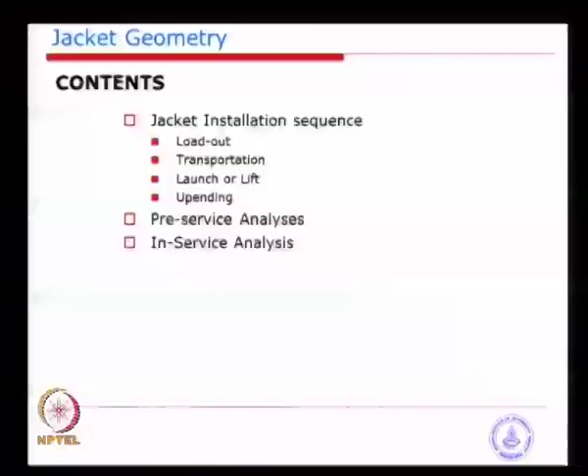So if you look at this structure, both structures have foundations in terms of piles fixed to the ground. In the previous class we discussed a template through which the pile goes through. In this particular case, the template is in a slightly different form because the water depth is larger. So we did not want to have a pile going through the leg, instead we have a skirt at the bottom through which the pile is going through. Of course, there is a connection between this pile, the skirt, and the leg, so that the load coming from the jacket structure can transfer to the pile foundation through that plated connection.

You see here there is a plated connection at this interface. By doing this, what we have saved is the length of the pile above, so much length instead of driving the pile through this. So now you have got only one pipe instead of pipe-in-pipe, which we normally have for the main pile. So these concepts have to be devised as early as when you are thinking about the idea of a platform at this location.

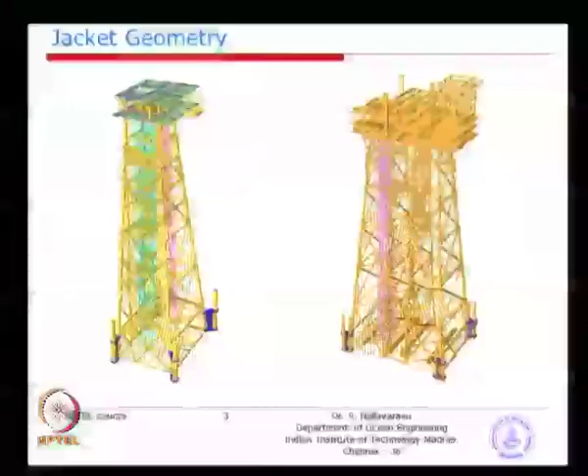Similar structures, most of them deep water structures, about 150 to 160 meter water depth. That is why you see all of them having skirt piles, but the number of skirt piles differs from platform to platform. You see here only 2 skirt piles, whereas here 3 skirt piles.

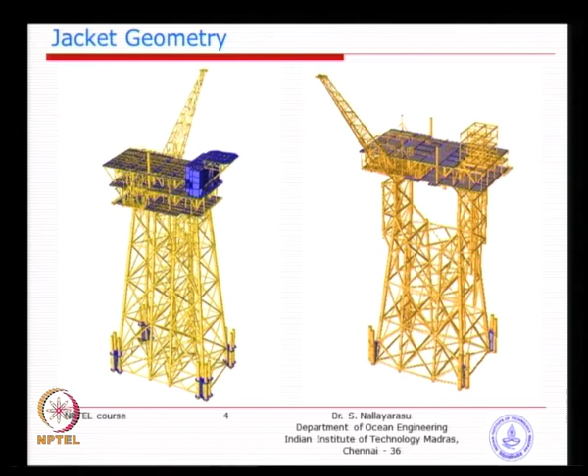How did we come up with this idea? You have to think. When you design a foundation system, some of you might already have gone through basic civil engineering, soil mechanics. As the load increases, you have 2 choices - you can go for multiple points.

The point load transfer by splitting the loads, distributing them to various points by making columns. When you design a simple building, you normally try to put 4 columns. Nobody wants to put a column exactly at the center of the room - that will not be acceptable. You put 4 columns, and if not enough, or if the foundation system is very weak, you put additional columns in the periphery.

If not enough, what will happen? You actually take the foundation deeper - that is the concept of pile foundation. When you design a simple spread footing for buildings, you dig say 2 meter, 3 meter depth spread footing foundation. If the loads are still so high that the foundation deforms excessively in terms of settlement, then you find ground or underground where the soil is stronger, so you dig deeper and deeper.

While doing so, the concept of foundation changes from a spread foundation to a point load foundation, which is basically the pile foundation. That is why in this particular case we have 2 piles which are adequate to transfer the load safely, whereas in this other case we have 3, because the loads are excessive.

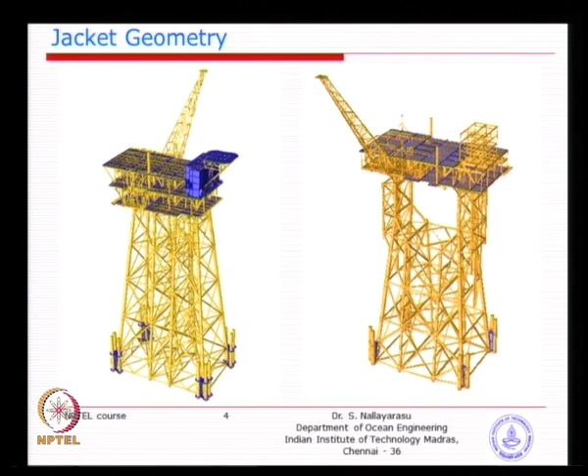So you see this picture at the bottom. When you place a jacket in upright condition, you could see that it has to rest prior to the piling being done inside. For example, these are the legs - you are going to do piling by driving the pile, but before that the jacket has to rest on the seabed. When you transport it to the final location, you place it on the seabed.

It has got its own weight. If the weight is too heavy, what will happen? Even before the piling is done, the jacket will start sinking below ground, which is not acceptable. So in order to prevent that, we have a temporary foundation in terms of a spread mat foundation - that is called mud mat.

In fact, it is given in the next slide. If you look here at the bottom, it's a little dark there, but you see a plate kind of arrangement at the bottom. That plate is nothing but a steel plate arranged and fixed to the structure, so that when you place a jacket, it takes the pressure due to its own weight, because it will take a few days before you start piling through the skirt sleeve, maybe 2 days later.

So the idea of the mud mat is very similar to any simple foundation design for onshore structures. Simply what we need is to spread the load in such a way that the vertical deformation is lower. At the same time, when you place a jacket in sea, it should also be stable.

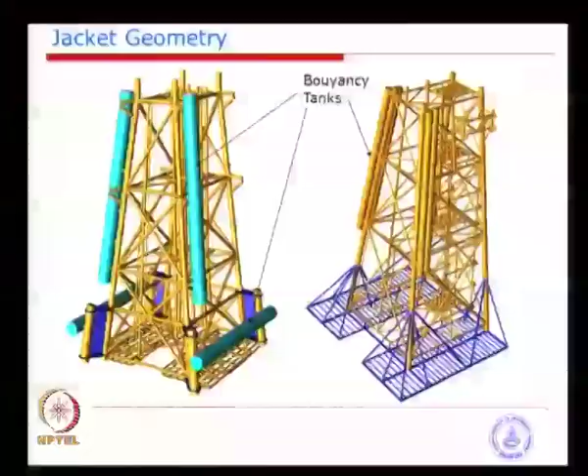It should not slide, number 1, it should not overturn. I think you might have studied simple overturning stability, sliding stability, vertical and horizontal equilibrium due to wave and external forces. All those things need to be done to arrive at the size of this foundation, because after all, if this is not safe, you can't do piling, because it will already overturn.

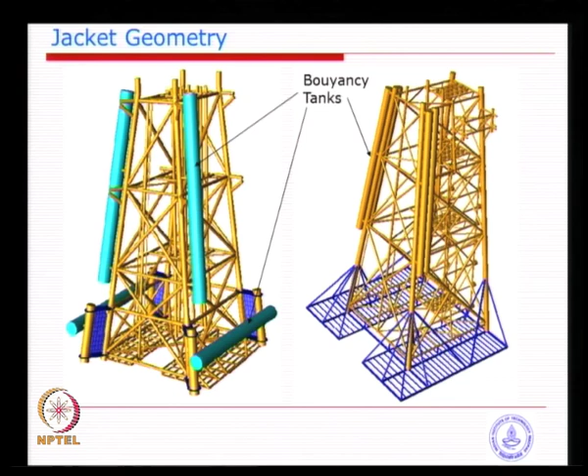A typical picture showing the fabricated jacket - you can see large diameter tanks placed together with the jacket. When you place it in water, these tanks prevent the jacket from sinking. Of course, when you design jacket members, each member has its own buoyancy, and the weight must be lower than the buoyancy, otherwise you will require additional tanks, very similar to a life jacket.

If you have travelled by boat, you will be given a life jacket, and you will see that you definitely need a life jacket if you do not know swimming, for self stabilization. So here the basic idea is these buoyancy tanks provide additional buoyancy to make sure the jacket is floating in the position we wanted.

You see here there are two buoyancy tanks, one at the bottom, one at the vertical or horizontal level. The weight of the jacket is heavier at the bottom - you can see from the shape itself, the left side is heavier and the right side is lighter. So one of the tanks is placed at the bottom, because you want the jacket to float horizontally so that you can do the upending later on. So all these manipulations or arrangements of center of gravity and center of buoyancy need to be worked out, to make sure it is stable all the time.

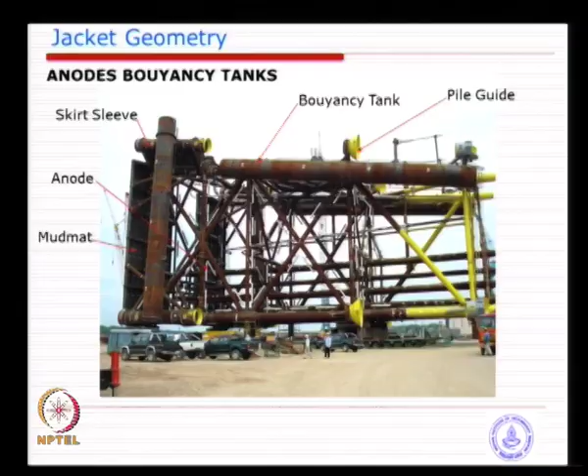A typical installed jacket in vertical position after transport and all that - it is basically prior to piling, resting on the seabed. Imagine if you have a horizontal load coming from wave and current, it should be stable. So one of the predominant parameters is the width of the jacket at the bottom. The larger the width, the better, isn't it?

You can easily imagine stability will be easy to get. If you narrow the width, then stability becomes a potential problem. So that is also to be kept in mind when you design a structure for the final service condition. You also need to look at what is the minimum dimension required to achieve stability, because this is the unpiled condition - the piling is not done yet, but before that it has to rest on the seabed and should not fall down.

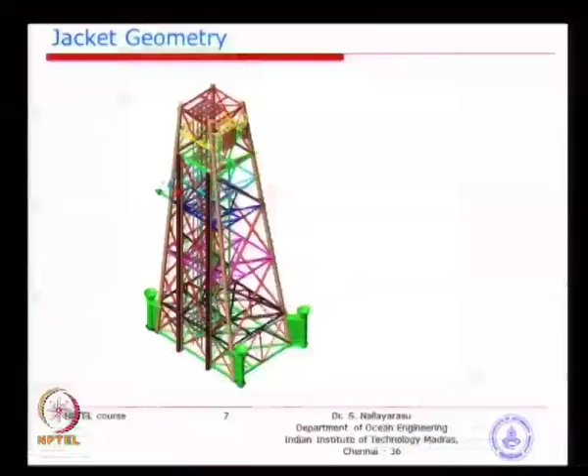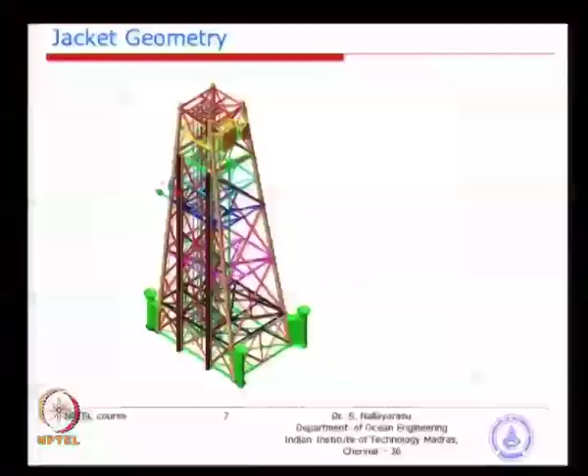If you have not taken this into account, what will happen? It will fall down. Many jackets have actually fallen down this way - even every year we have several accidents happening. Last year two jackets fell down like this, because of inadequate design, or there could be a potential problem with assumptions made, like soil conditions or sea conditions. You make an assumption of sea condition of this much, and it exceeds in some cases. So our design has to take into account such variations.

So we are going to look at one by one what load out is. You see this jacket - on the right hand side is the yard, and on the left hand side you see the barge floating in water, and in between the yard and the barge we have a flexible element, because you do not want the barge rigidly hitting the yard foundation.

So basically you have a fender system - normally used in most ports and harbors. It is circular cells placed so that when the barge is trying to move, it does not get damaged against the wall. That is the idea behind it.

You see here the jacket has to move forward to get onto the barge - somebody has to pull it, no? So basically the idea is, if you keep a winch here, can you pull it? We cannot pull it directly, because the barge is a floating object and you may not get a reaction point. So the idea is very simple: keep the winch on the ground and have a pulley block arrangement such that when the winch is pulling forward, the jacket will move backwards.

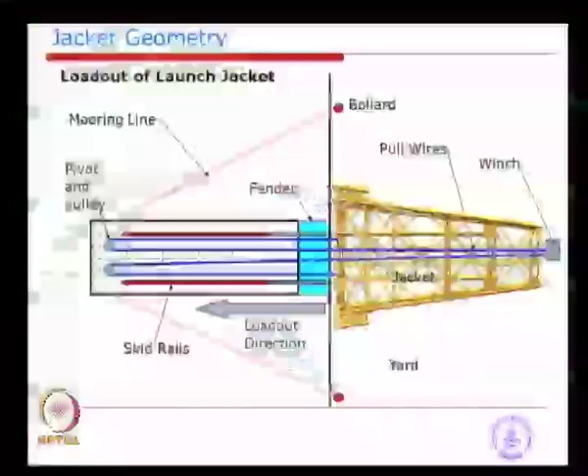You see the reverse arrangement, normally done this way to avoid problems. At the same time, the barge is always kept towards the land, so that during load out, if the barge moves away, what will happen? The jacket will go into the water. So by doing this arrangement, the load out is allowed to happen in a safe manner.

Now, you see here this barge is in a floating condition. It is not stable like in calm water. Even in calm water in an inland water body, you can see some slight movement due to wind and locally generated sea disturbances. So this is going to be done not in open sea, but sheltered water, still you will have sea conditions not as good as you wanted. You may have barges moving up and down, rolling and pitching.

So what you will see is that as the jacket moves partly onto the barge, if the barge moves up and down at that time, what will happen? You may actually damage the barge or damage the structure. So this condition needs to be assessed carefully and designed.

The idea behind this is you cannot prevent the activity from happening. Sea conditions you cannot change, you cannot stop the load out. Stop load out means the project is not there. So activities have to go on.

What precautions we have to take is forecast or predict such issues upfront, design the jacket, design the barge. So that is where we need to think about what can happen, what cannot happen, and what is the probability of that happening.

If it is only very low probability, you might say I will take a risk, because this may or may not be happening. But if the probability of occurrence is higher, you better take that as a design activity and perform it to make sure that at the time of load out you do not think about anything else, you can still go on because that was part of the design. So this load out simulation we have to think about.

Load out can be done by skidding, or it can be done by machineries, basically trailers which carry them. So what is the difference? When the weight becomes too heavy, for example 5000 tons, can we find a trailer to take them off? It may be difficult. That is the time we decide to do skidding, because trailer capacity is limited by the number of axles and the capacity of the tire pressure. So typically up to about 2000 to 3000 tons you can use trailers, but as the weight increases to 5000, 10,000 tons, we have no other choice but skidding.

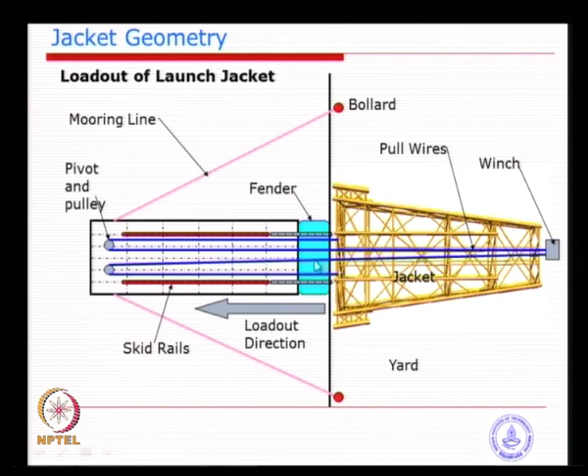Now, you see in the next picture, you could easily understand the jacket is being pulled from ground towards the barge, and in green color are basically the kind of pivot points, because the next time when we want to launch it, we will go in the opposite direction. For example, we load out in this direction, forward movement this way; when you want to launch it, it will go exactly opposite. So that is why you see a pre-arranged setup where we have a pivot there.

So when the jacket is going forward, you will be able to dive into the water without damage. Normally, if you have gone to a swimming pool, the dive board is a little cantilevered from the edge of the pool, you understand the idea. It should also be a little flexible, not very hard. So exactly like a diving board, but it allows the tilting of the jacket while being strong enough to carry the loads. So that is called a rocker beam or rocker arm.

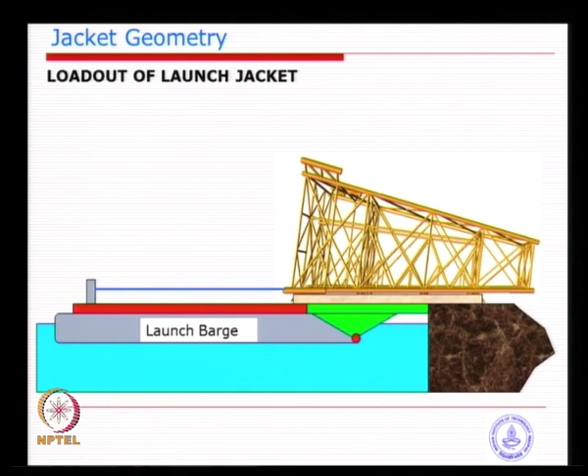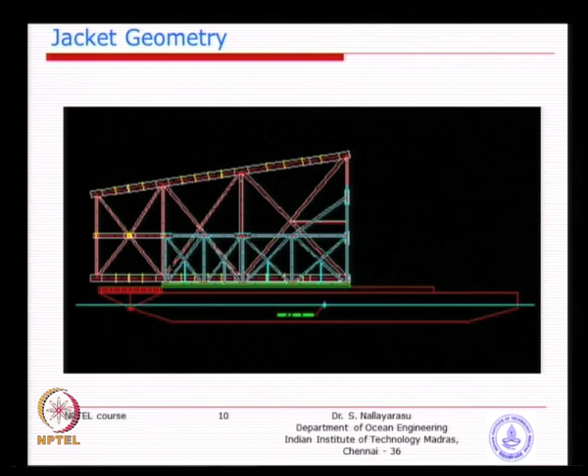So how do we get such capacity? Over time now you see many contractors have large capacities like 10,000 ton capacities, whereas if you see cranes on land, you might see 50 ton or 100 ton cranes. Why could we not get a 5,000 ton crane on land? Have you seen a 5,000 ton crane? Anybody building a full building and then shifting it off?

Mainly the problem is the counterweight. You will see every crane on land has a counterweight at the back. If you want to lift 20 tons, you will have a counterweight at the back, some amount of weight to manipulate so that the crane is stable, otherwise it will become unstable. Whereas in these offshore cranes, we do not need that counterweight.

So how do we manipulate? The counterweight is easy to achieve by means of ballasting water on one end. So if you have a crane located on one end, the other end you fully ballast with sea water, and because the structure is floating, it can get an easy way of balance. Whereas in land based structures, physically, if you need to lift 5,000 tons, you need a more than 5,000 ton counterweight. Where do you get the counterweight? Where is the space? So the crane will become too big.

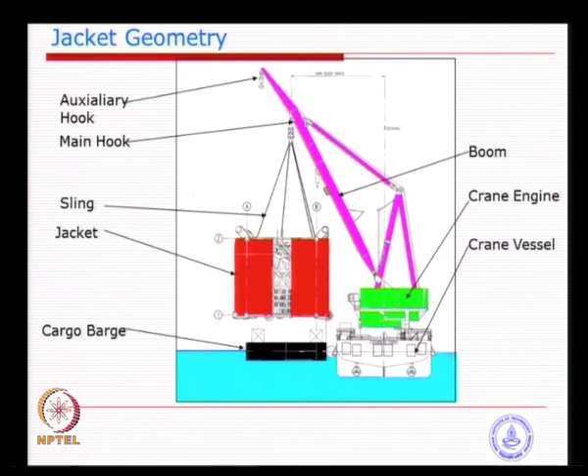As long as the jacket has sufficient buoyancy, it will float; if not, it will sink. So that evaluation has to be made before we lift off, and you should have sufficient buoyancy. What should be the requirement of buoyancy? We need to find out the codal requirements: minimum 10%, normally we allow for 10 to 15%. That means if the weight of the jacket is 1000 tons, you need 150 tons of excess buoyancy. So when you are designing it, you need to provide adequately.

If you do not have buoyancy, then you attach additional buoyancy chambers, specially fabricated for that purpose. Sometimes we actually have commercially available buoyancy chambers that you can just buy and attach, or you can make a steel fabrication attached to the structure.

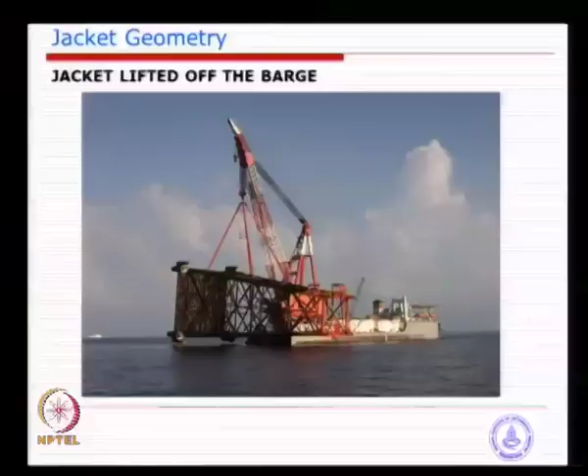Typical crane vessel. This is what I wanted to show you. See, the crane is on one end. If you are doing a heavy lift using this crane, you can do ballasting of the hull on the right side. That is the idea behind it. All offshore cranes have huge capacity, ranging from a few thousand tons up to typically about 10,000 tons. A 15,000 ton crane is also available in some parts of the North Sea; some contractors have such capability.

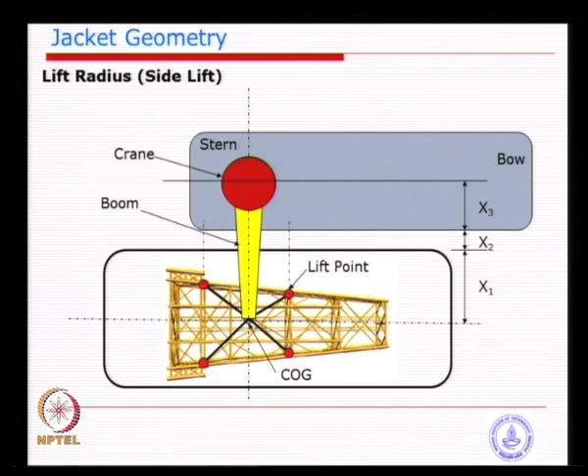So if you try to do it elsewhere, it becomes unstable. So basically that is the idea behind it: any lifted object should have the center of gravity below the lift point. So the crane is coming and that lift point can be located accordingly. That is again to be selected by the designer.

So you see here the left side and right side distances between the lift point and the center of gravity. If it is equal, it is good, isn't it, because of 50-50 distribution. If it is one-sided, it is not very good. Sometimes we actually do it - for example, if the center of gravity has shifted towards the bottom of the jacket, you shift the lift points, then only it will be stable. Otherwise, what will happen? It will start swinging, and that swing can damage the structure, and can also damage the barge.

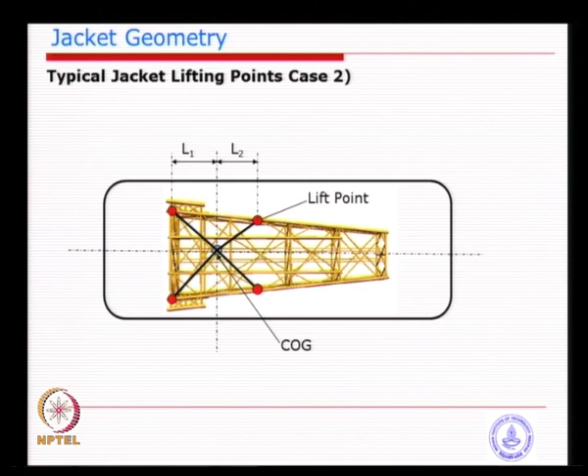A typical simulation to design the structure sometimes involves this kind of condition: skew load, because the cables are not cut exactly to length. Imagine you have 4 cables, and 2 of the cables are longer than the actual length required theoretically, by say 50 mm. What will happen? Those 2 cables will not take the load, and the other 2 cables will take the full load. So that is a kind of simulation you need to do, because cutting a cable of say 200 mm diameter to the exact length and manufacturing it could potentially prove to be difficult. So eventually it may happen or it may not happen, but the probability is very hard to establish.

By experience, designers will be required to make such assumptions, because there is a high probability of this happening, since manufacturing a cable is not done by machine alone - personal intervention is required. So this kind of condition also needs to be simulated.

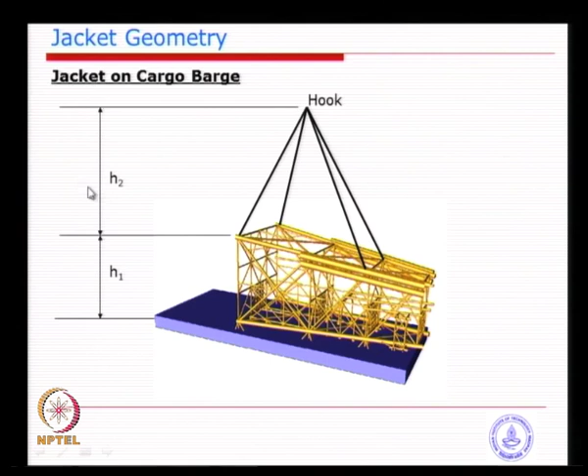The third thing is the height at which you actually attach the crane, because the higher the elevation you go, it is better, isn't it? You get a larger angle between the horizontal and the sling. Imagine if the cables are vertical, it is better, isn't it? There is no horizontal compressive force coming in. But the higher you go, the crane may not be able to reach it. See here, after this angle the crane cannot go any further up. So it is limited by the crane height, so we cannot do that.